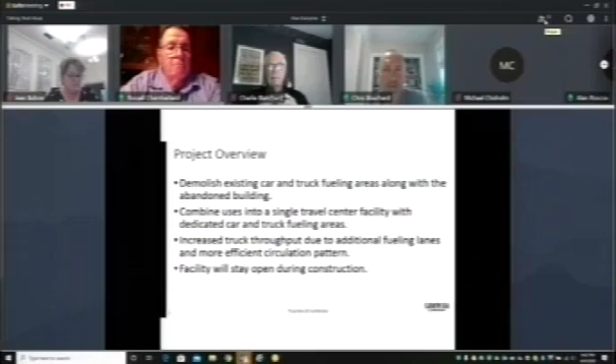We're going to demolish those, as well as the abandoned restaurant event center building in the center of the site, and combine all of the uses into a single travel center facility with dedicated car and truck fueling areas, much more similar to what you'd see at one of our normal facilities.

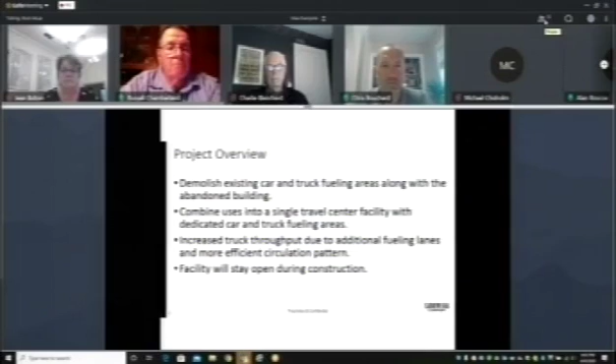One of the huge benefits for everybody is increased truck throughput due to additional fueling lanes and a more efficient circulation pattern.

I want to make it very clear, we are not expecting to get more trucks. We have all of the business that we expect to get, but right now we have 6 fueling positions for trucks, and the way that they enter the site and get to the fueling lane doesn't provide a lot of stacking on our property. We've got some exhibits to discuss this.

By changing the flow of trucks into and through the site, and by going to 9 truck fueling positions, we will be able to more rapidly serve the guests that are coming to our facility.

On top of that, all of the fuel system, other than the above-ground tanks, which are state of the art already, all of the piping, all the dispensers will be upgraded. So we should get some increased throughput just by better equipment that's going to fuel the trucks more quickly.

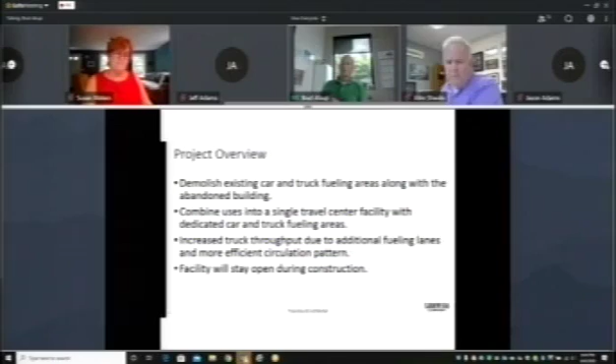And not to mention the building is going to be new, fresh looking. We're going to get rid of that eyesore that is the abandoned building. The convenience store area and gas fueling area will get much more efficient, and we will have additional gas fueling positions.

Usually the car traffic is not the issue, it's the truck traffic. So that will get better.

The facility will stay open during construction as much as possible. There will be a time where we will have to close to swap from the old buildings to the new, but we will minimize that downtime as much as possible to minimize impact to our customers, but also minimize impact to the community.

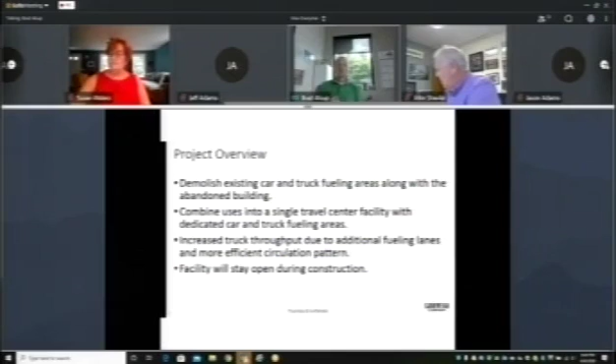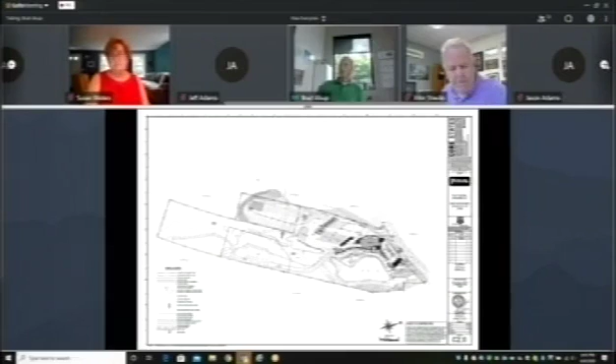You've got parking back here that's relatively undisturbed. The hotel, which is a tenant of ours, and that land lease will continue. And then there's the water treatment, the well and treatment system, and the wastewater treatment system up here. So that's the overview of the existing site.

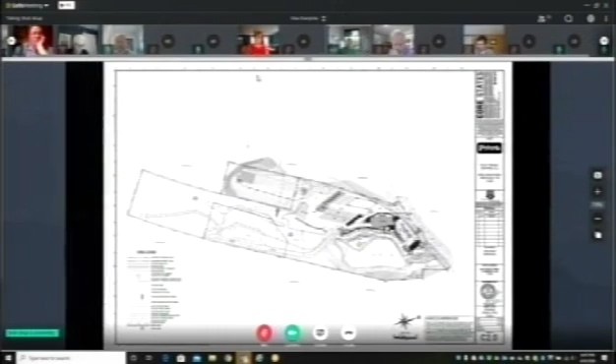Again, just blow-ups of the northern end of the site—not much to really talk about there at this point. And then the southern portion, or really the central portion of the site, where the truck fueling is.

On the screen now, you will see an overlay of the proposed on top of the existing. Everything in blue is the existing condition, everything in red is the proposed. So you can see that the new building goes in place of the abandoned building in the center. The gas fueling area will be in front of the new building, and the old gas fueling area will become parking. We have our propane tanks and our new underground gas tanks there, but that's all parking.

Then the truck fueling area moves from where my cursor is now to closer to the new building. The key that we'll get in a minute is the reversed flow for the trucks. I think it's also important to point out, where my cursor is, there's kind of an outline here, a dashed line. That is all currently a paved area.

We are removing all of that asphalt. We're going to put a curbed area to keep trucks from getting closer to the well, to get into our water treatment area. I think that's going to be a very big benefit, one, because of the decreased impervious surface, that'll help from a conservation and environmental standpoint, but also it's going to help an area that's probably a little bit abused by guys going through the boulders and pushing them out of the way. They won't be able to do that with the curb line.

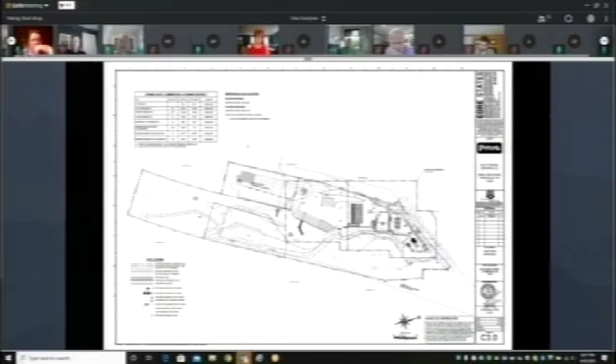We upgraded that 5 or 6 years ago. It is state of the art. Our discharge is very close to drinking water standards. It's much better than what we had before.

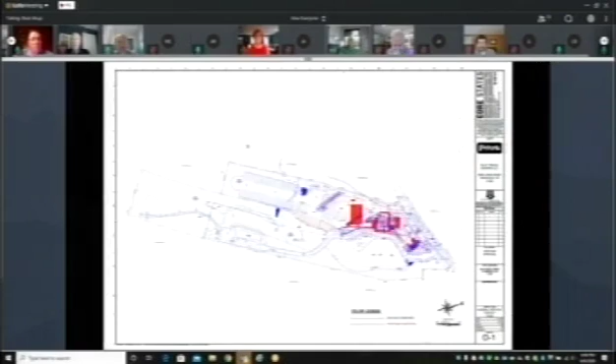I'm actually trying to go back here to the existing conditions. All of these lines you see going at a diagonal, that is the current wastewater leach field that is under our parking area. We have no problems whatsoever with that system, it works really well. But as a result of the construction and moving things around, we're going to try to get that out of the way of all the construction.

So what you'll see up in the southwest corner of the site in the parking area, you'll see some heavier line. That is a new leach field. We've already done the test pits, the soil perks spectacularly. We are working with the DEP right now to go through the permitting to relocate all of our leach field area up to this area, so it's more compact. It's out of the way of most of the traffic. It'll still be under asphalt, but that will not cause any problems.

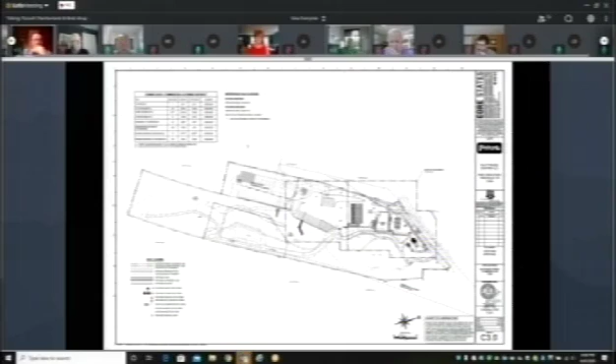So that is one thing that is not detailed in all of the site plans that you've looked at. I've got an environmental consultant working on that, and we'll certainly provide information to the town about that.

Again, kind of a blow up of the northern end of the site. So you see the new building, the new truck fueling area with scale, the new gas fueling area, and then where the gas fueling area and building are now, because of parking, we've got underground gas tanks, new state-of-the-art double wall tanks, and then this is just our propane tank to serve for heating and cooking.

You'll also see right now we're proposing a third entrance point. This is the existing car driveway, this existing truck driveway. We are working with DOT right now to try to get a third access point approved to better provide access for cars coming into the gas area so they don't have to make a bunch of turns, but also to be able to get back to the hotel a little more easily. So that would be more of a direct shot.

We are working with the DOT. If for some reason they denied us the third access, we would push to get the new access and close the old. We're working with them and hope to hear back from them very shortly. But the truck access would remain unchanged other than just being repaved and cleaned up.

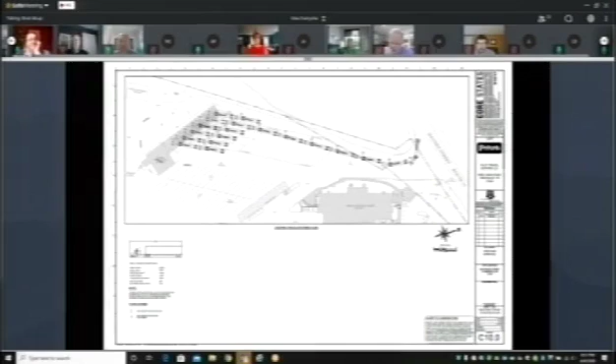Now you see with the reverse, with the new layout, instead of trucks coming straight in off the highway, they are now circulating through the site, and there's more room behind the canopy, plus more fueling positions. The last truck whose tail is not out in Haines Street is number 38. So we are doubling the stacking on site for trucks, which is a huge benefit. And again, with better equipment, the throughput is going to be increased even that much more.

Once the trucks fuel, they're supposed to pull forward to the edge of this concrete, what we call the pull forward line, so the next guy can start fueling while the one who just finished runs inside to pay or grab snacks, use the restroom, whatever he needs to do. So a much more efficient flow, and with the increased capacity, a lot more ability to get trucks in and out of the facility in a much quicker manner. This should eliminate congestion out on Haines Street due to our guests.

This is the grading plan. Rather than go into all the details, I just wanted to point out a couple of things. Here's the Ovide Pond that obviously has buffers and has to be protected, as part of the stormwater improvements to improve the treatment, retention, and recharge. I'll let Alan jump in if need be if you guys have technical questions.

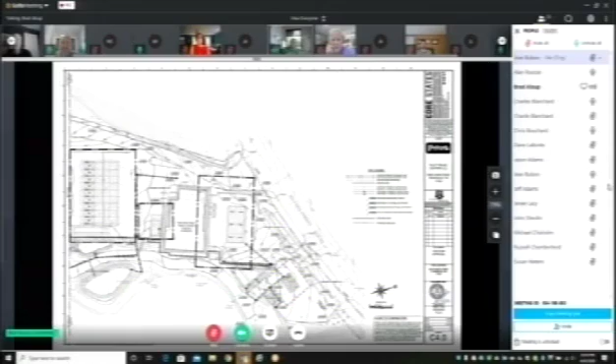Another key, I think, is currently there's parking on both sides of this driveway. That's being removed, so it takes away an opportunity for something to be dumped or spilled if somebody's parked there, whereas now it's just a drive area and there's no room for people to park.

Again, this is the grading plan. There's no ponds back here, but you can see the area that's currently asphalt will just be grass, but able to sheet flow.

The next 2 sheets are the wetlands buffers, in case you guys are interested in looking at and seeing where all the different buffer levels are. There's several dotted lines here - I don't know how easy it is for you to see. One key to notice is this circle right here, a 295-foot protective radius around our wellhead.

And the next page might help - you can see a little bit more of it and the actual well. We can't do any stormwater recharge in that area. So originally we had hoped to put ponds closer to this area where we're pulling out asphalt, but we're not going to be able to do that because of state regulations.

But again, it will be grass instead of asphalt. And then a little bit of our leach field gets into the 200-foot buffer, but it's already an asphalt area, so there's really not any change as far as that goes. All told, we are reducing the impervious coverage by slightly over 1 acre.

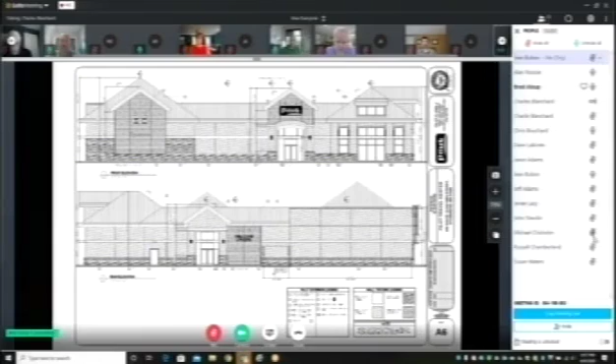Okay, Jean, do you have anything you'd like to say or add? Do we have, or have John take a time to discuss what this review has been?

Sure, I can just give you a little bit of a brief overview and then ask John to chime in. Just by way of background, town staff has been working with Pilot Travel since, I believe, the end of last summer, beginning of early fall, to get the plan to the stage that it's at now. They've come a long way. We still have some ways to go with it, but I think we're making really good progress.

The plan has been approved by the Design Review Committee already as far as the architecture and the signage. We do have a few signs that I'm working with Brad on, and we'll be having him come back for a special permit probably sometime this summer. We requested quotes for peer review, and Park Corporation was chosen to do the traffic peer review and also the stormwater management review on behalf of the Planning Board and the Conservation Commission as well.

The preliminary reports have been provided by Mr. Shevlin. You received a report last week on the traffic, and just late this afternoon we sent you a stormwater management report. I think it would be helpful now if John could go through his findings and update the board on where we are with that review process. But in summary, I think we've come a tremendous way. We have a little ways longer to go, and in the end we'll have a much improved travel center. So with that, I'd ask John to provide his findings.

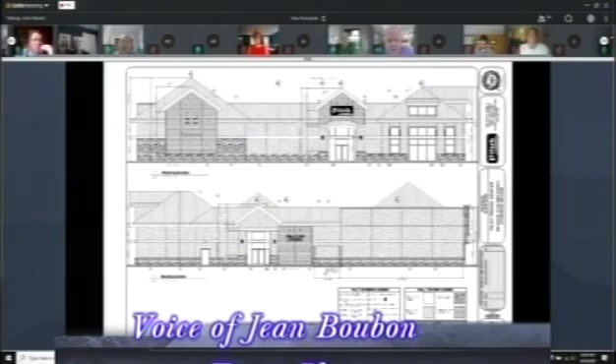Thank you, Jean. Can everybody hear me? All right? Am I coming through okay? Yeah, all right. Thanks for that description.

That helped a lot. I think as far as the traffic goes, it addressed some of my concerns. My biggest concern was the fact that it was reported in several areas that queuing occurred on Haines Street. I don't know what level of detail that queuing occurred, but seeing this plan showing how it steps up, what the queue length is, and how it's operating, and obviously they're increasing that, doubling the stacking lane, I would think that's more than satisfactory to not impact traffic.

John, we're having a hard time hearing you now. You are? Okay, what about now? Can you speak a little louder? No, we can't hear you. Is there any phone number I can call in, Jean? John, there is a phone number you can call into. What is that number? Tell him to move away from the computer. Move away just a hair, John. That might help. Try speaking now. Is it better there? Try, count to five. Can you count to four? One, two, three, four. That's better, is it better? Okay, thank you.

I know these came in late, so I think there needs to be some time for him to go ahead and review. I think a lot of them can be answered, but there may be some that I think he, and I don't want to talk for Alan, but I think he's going to provide more information for. So I don't know how much detail you want to go through these.

There's a lot of specifics and details on the plans that we made comments on. The overall stormwater drainage, I had some comments in regards to information on the soil information at the basins. Do we have any information as far as what the soil types are there?

And I know that's something he said if need be, he would certainly go out there and handle those. There's comments regarding the operation and maintenance plan. I know he said he's preparing that, so we would anticipate getting that as well. So I tried to go through all the documents as far as the plans, the stormwater report, the project narrative, notice of intent, and address the stormwater standards. I think based on the design right now, some of the standards need more information provided in order to meet those. So I left it at that with Alan, and I think we're going to continue to have further discussions. I think a lot of these should be able to be knocked off pretty easily. So that's a quick summary.

I don't know what level of detail you want us to go into with the comments, or if Alan wants to add anything. Well, John, I think we're pretty sure we're going to be continuing this public hearing anyway, so I think the only thing would be if you have any major issues you're concerned about.

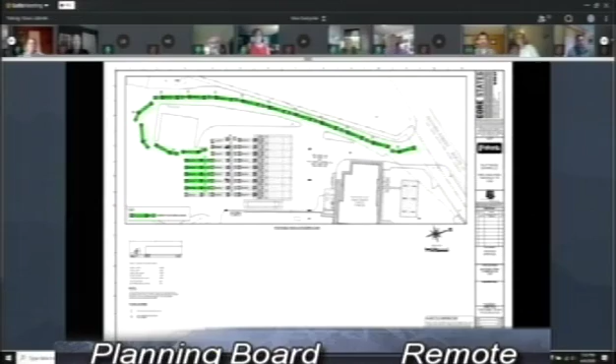Perfect, and I saw that you have the oil water separators - I saw that there were two details, one is cylindrical and the other is rectangular and concrete. I was looking at the drainage and grading in some detail. Can you just confirm that all of the inlets have oil water separation?

So I want to address the two different types of separators. If you're looking at my screen, here's the diesel fueling area. The line right where my cursor is is one break point in grading, and the line on the other side of the canopy is another break point. Everything outside of those two lines drains away from the fuel canopy, meaning we don't allow any storm water - rain, snow melt, whatever - to come into our canopy area. Everything under that canopy drains to center island catch basins, so that's the only way we're getting our oil water separator flushed. It's not too much of a flow - it's anything spilled while they're fueling, an oil leak, snow melt, or water that drips off since the trucks are wet, what have you.

So we capture all of that in catch basins that is piped to this cylindrical oil water separator. That is a standard separator that we put in every one of our facilities. It's a 4,000 gallon flow through. I don't remember the exact numbers off the top of my head, so I don't want to quote it wrong, but it has a very hefty flow rate that it can treat.

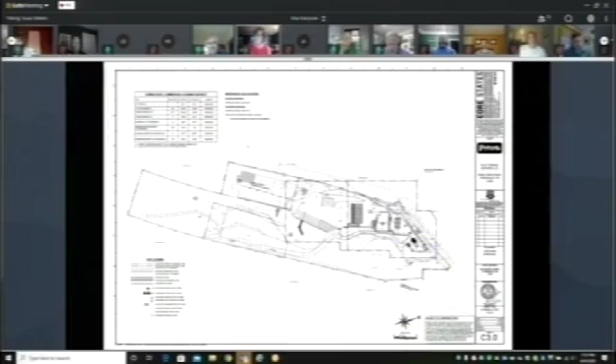Everything else has been covered that I have questions for. So I thank you for this project, and I welcome you to Sturbridge. Thank you, ma'am. Great, thank you, Sue. Chris, do you have any questions? I think everything's been answered. I thank you again, guys, for presenting this. It's a very smart design, and like everyone said, it's an upgrade, and certainly a very efficient design you guys have come up with. So thank you. Thank you. Very good, thank you.

Gene, do you have a time on the third that you'd like this to be continued to? Yes, I would suggest we continue it until Tuesday, June 23rd at 6:35 p.m. We do have other business, but it hasn't been advertised yet, so I think it would be important to do this first. Okay, I'm sorry, did you say 6:35? Yes, 6:35 on June 23rd.

Before we ask for a continuation, Gene, do you have anything else you'd like to add? No, I don't. We'll continue to work with the applicant to go through the fine details that came out this evening, some questions and comments, and work with John to continue his review, and hopefully have a final report back to you in time for the 23rd. And we do need to check the public line, Charlie. Charlie, they didn't go over the architecture yet. Right. Okay, and I have another question.

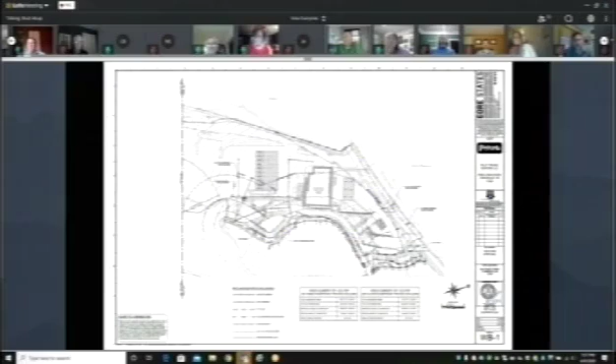Okay, go ahead, Sue. It was mentioned that there'd be a chain link fence around the tanks, is that correct? There would be a chain link fence around the propane tanks, which are here.

I'm trying to see where that sits on the property. Is that in the corner off the main property? It's basically right beside where the little gas building is now.

I just didn't know if there might be a nicer way to fence that in to protect clients, visually more. We can put rails and things like that around it, but a chain link fence typically keeps people out because they're not going to climb it. If you put a wrought iron fence, a kid might try to squeeze through, whereas with chain link it's very unlikely.

We try to plan for all of those things. And the idea of guardrails, I don't think we have a definitive answer on that. My position would be that we've got a curb to stop vehicles, and a fence that provides a visual barrier on top of the retaining wall, and that should be more than sufficient. If we go to a guardrail instead of the fence, people are going to sit on it and climb on it, and I don't want them falling to the bottom of that retaining wall and getting hurt. So I think the fence provides a better barrier in this case.

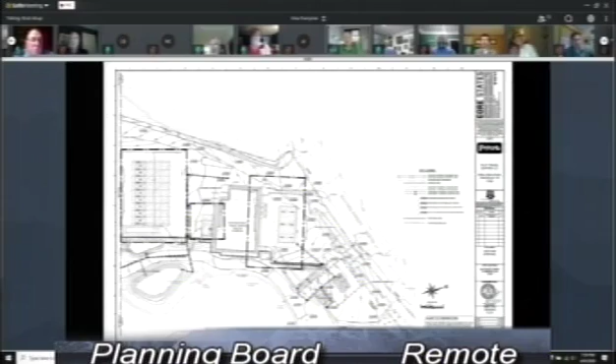I apologize, I wasn't proposing replacing the fence. I agree it's a good 10 foot tall, or 8 foot tall. I thought maybe the addition of a guide rail might help. We can look at it, but we do need to be cognizant of space restraints. Let us look at it and come back with some reasoning one way or another, or a change.

I just needed clarification. My question's been answered, and I thank you. Yes, ma'am, okay, thank you.

I just had one comment, if I may. To Brad and Alan, if you just look at the details, doesn't that wall extend up a foot over the finished grade? Just look at the retaining wall details. Let me look at that again, I'm looking at S1.1.

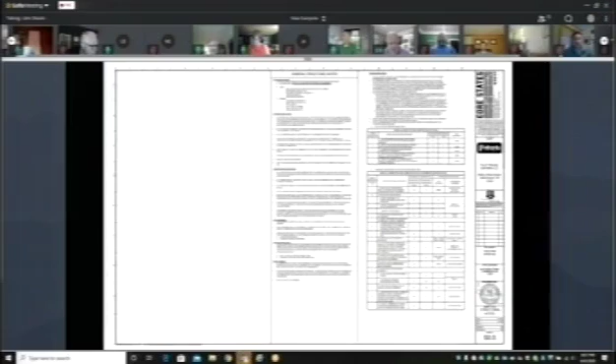I don't know what my screen's about to do. Sorry. Just something to look at later on. I thought from the detail that the wall extended up above the finished grade. Yeah, it does extend up, probably a foot. So it does extend up one foot.

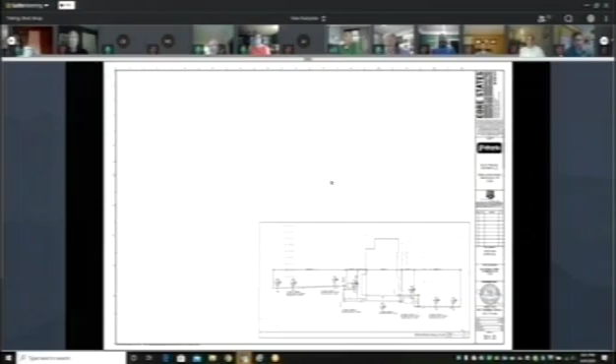So there you go, that's going to provide, in addition to the curb line, some additional barrier to vehicles going over.

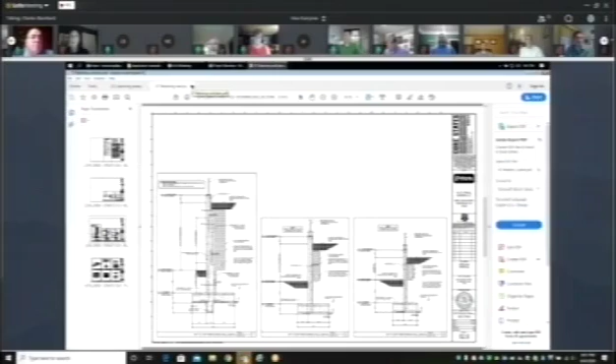Very good, thank you. So, Gene, do we have anyone from the public interested in asking questions on this section of the site plan review? We will find out. Good evening, this is the planning board meeting, public hearing on the Pilot Travel Center. Does anybody have any questions or comments on the Pilot Travel Center? We have no one on the line, Charlie.

Okay, great. Brad, you want to then continue with the architectural details? Yes sir, I'll quickly go through that.

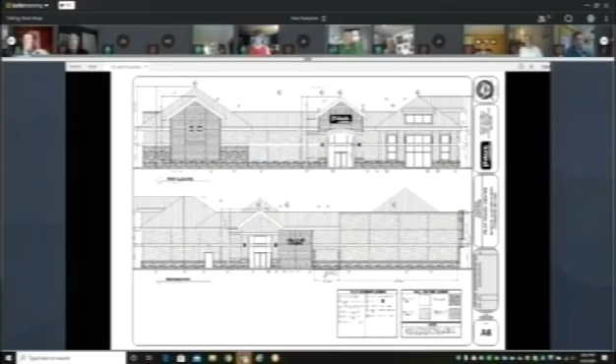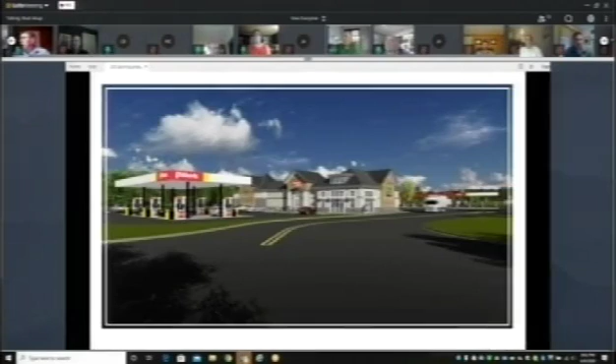So here you see the proposed building. I do have a color rendering to show you, but it's a combination of EIFS, synthetic stone, Nichiha synthetic wood panels, and we've got a standing seam roof on it. So it's definitely a more modern look than what is there now, but I hope everybody agrees it's a much cleaner look. There's a color rendering so you can see how the facility will look. It should be a very significant improvement, especially over the abandoned building that's frankly in a state of disrepair.

You can see the fuel canopies. This rendering is not correct - the Pilot sign here would not be on the canopy. We would only propose to put one on the front face, and there would be no Pilot sign on the rear canopy. I did not have the rendering updated, but the main focus is what the building looks like. So you can see very neutral tones, a good, classy looking building.

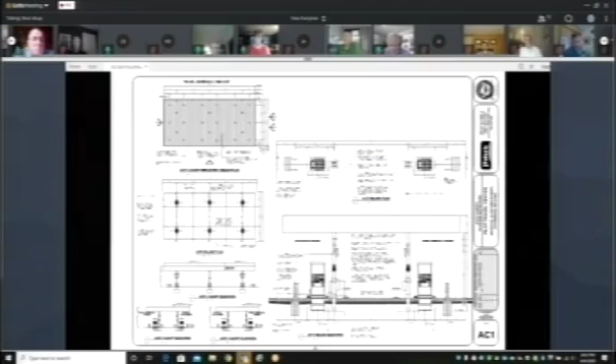This is a canopy elevation for the auto canopy, and again you can see only one pilot logo on there. The rest of it is the red and white and yellow stripe. Gives you an idea of what the canopy rendering, at least the front face, looks like.

The diesel canopy has no pilot logos on it, just the red, white, and yellow.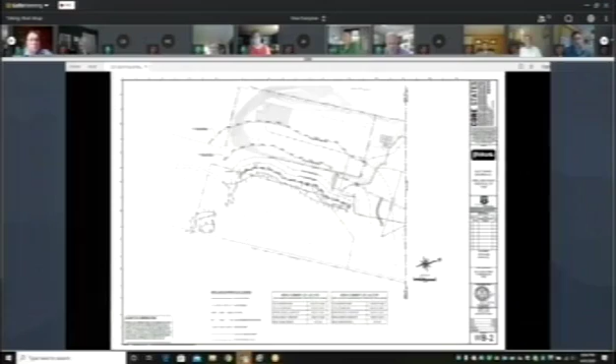One thing we did, I know there's a prohibition against internally illuminated signage. One thing I would request, we're looking to put an LED pricer for our DEF. It's the only price it has on it, so that when truck drivers come in, they can see that yes, we do have DEF at all lanes. That's important for them to know, and also what the posted price of that DEF is.

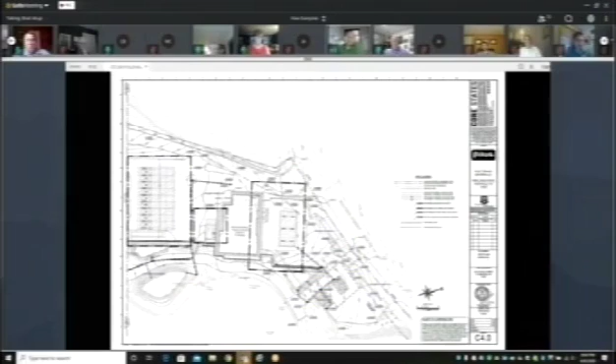This would be on what we call the entrance side of the canopy, the side that the trucks enter. It would not be visible from the road at all.

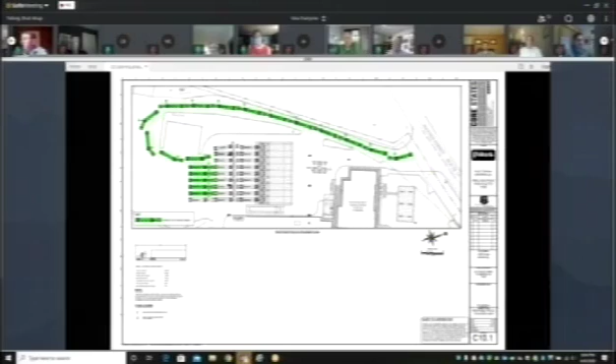We can't use a plastic-based pricer in that regard, because whenever the price changes, I can't have somebody going up on top of the canopy to change it. So we'd like to be able to do it remotely. That is one request we are going to make as far as the special permit, and see how that goes.

And that gets us to the signage. Right now I don't have a photo of the existing signs, but they're kind of small and spread out. We're looking to put in kind of a larger directory sign. We're at 18 feet tall, which I believe is what's allowed by code.

From a square footage standpoint, we're requesting additional square footage over what's allowed in the code, but you can see we're going to have the pilot. We're going to post our fuel prices, and these would be the plastic ones that they reach up with a pole to change because they're not in a flow of traffic.

Subway, Cinnabon, Auntie Anne's, and then PJ Fresh is our internal food offering: pizza, wings, pot roast. It's got a variety of things, many of which are currently sold in the diesel building. But that's the sign we're proposing.

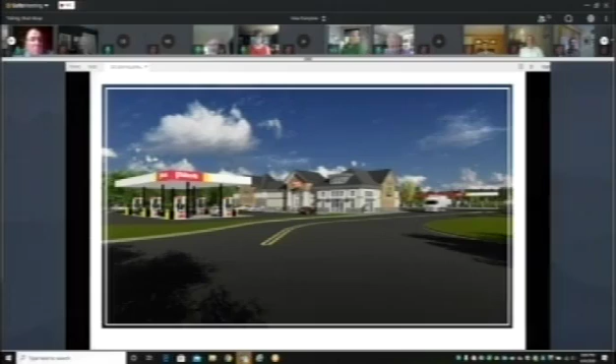The wood-looking thing you see here is actually Nichiha panels that match what you see behind the pilot sign, and the stone at the bottom of the sign would match what's on the building, so it would tie in architecturally. I'm sorry, I don't have that in a color rendering, but it would tie in architecturally and provide a more cohesive sign and building package.

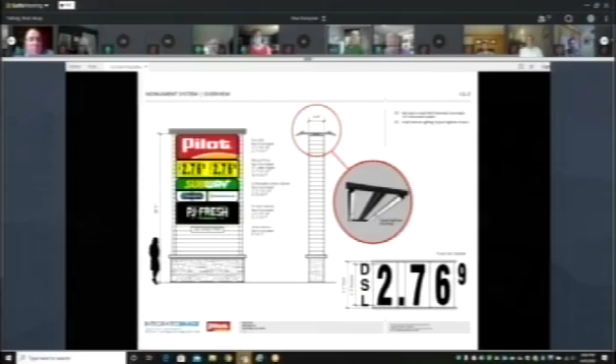It would enable us to let our guests, the motoring public, know who we are and what we have to offer for their consumption. And these signs would be externally illuminated.

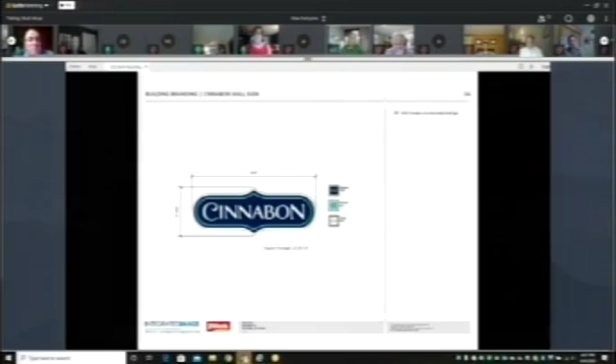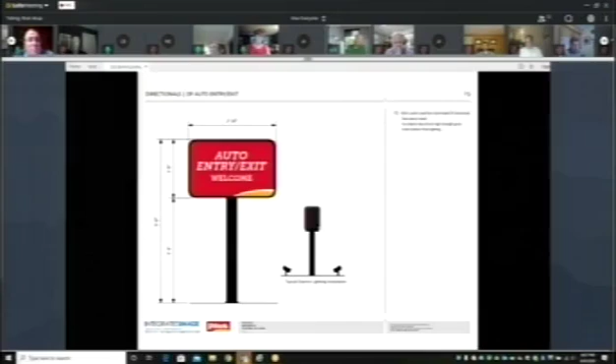Going to, I believe, Dane's question about the directional signs. So at the car entrances, the entrances designed for passenger vehicles, this is what you would see. One at each entrance, auto entry and exit, pretty straightforward. And then for the truck driveway, you're looking at the same thing.

These are compliant with the ordinance, if I'm not mistaken. Certainly would like to have bigger ones if at all possible, just especially for the trucks to make sure they know exactly which entrance to go to. But these are compliant, and that's what we've requested permission to install. And I believe that is the end of my presentation.

Great, thank you. Jane, do you have any comments on the request or some of those special permit requests? Yes, we'll be working with Brad as we go forward to refine his sign package. Almost all of the signage on site is compliant, so the monument sign, one of the pilot signs on the building, and the DEF will all be special permit requests that will come before this board, probably later in the summer. There's plenty of time, as construction will take some time, but probably July or August we'll be working on that.

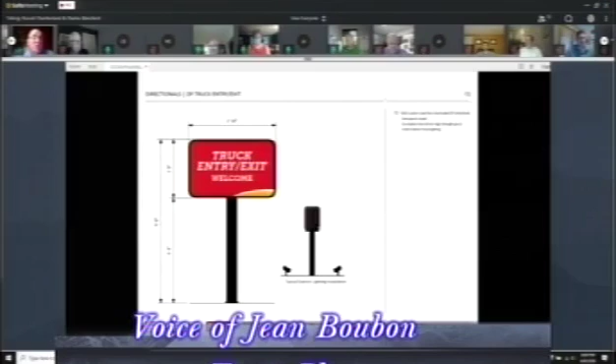Okay, great. Russ, do you have any questions or comments on this part of the presentation? No, I just think the building looks great, and can't wait to see it come to fruition. Thank you. Jeff? No questions. Good work. Looks good.

Great. Dane? No. Dane? Thank you. No? Great. Okay, Mike? It's just Charlie. Sue?

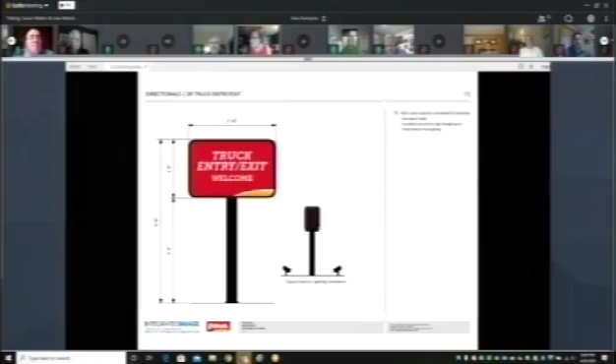Quick question, the welcome drivers sign, are you looking to have that illuminated? Typically it is externally illuminated, so we could put a row of lights on. There's a canopy over that building, so that when people are coming in and out, they have a chance to get out of the rain before they open the door. So at the edge of that canopy, I can put a row of lights that just shine up onto it. So it would be external.

Great, that's great. Chris? No questions. Okay, good. Jane, do you want to check if anyone from the public would like to make any comments at this part of the presentation?

Okay. Would any member of the public like to make a comment on the architectural renderings of the Pilot Travel Center? Is there any public comment on the architectural renderings of the Pilot Travel Center? No, we're all set, Charlie. No one's on the line.

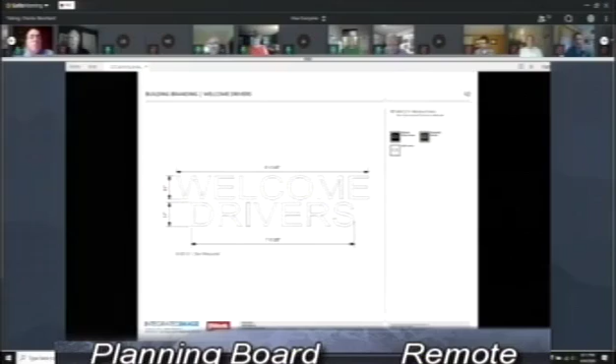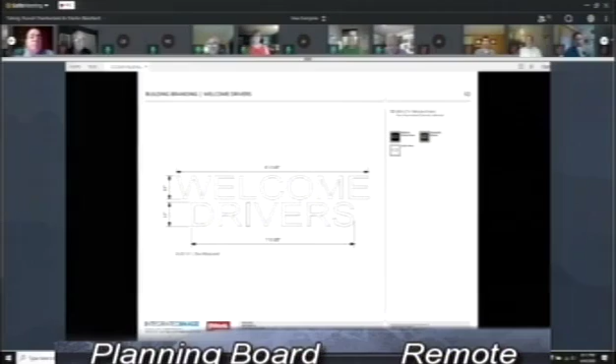All right, great. I think we're probably ready then to make a motion to continue the public hearing until 6:35 on June 23rd. Would someone like to make a motion? So moved, Russell. Second. Sue? Thank you. Russ, how do you vote? Yes. Jeff? Yes. Dane? Yes. Mike? Yes. Sue? Yes. Chris? Yes. Great, and I vote yes.

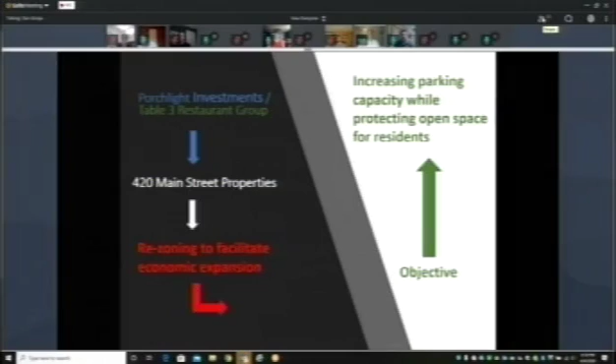This is just showing the 420 Main properties. Really what we hope to do is rezone for additional parking to continue to facilitate the economic expansion that we started back in 2014. Going through the process last year led us to the objective of really increasing our parking capacity, which was not our sole one, but I would say it has a greater focus on protecting open spaces for residents in this plan. So we can move on to the next slide.

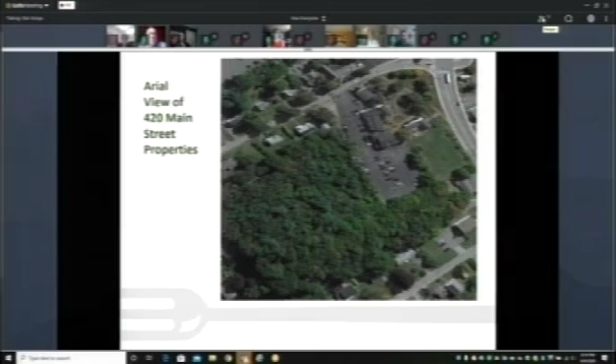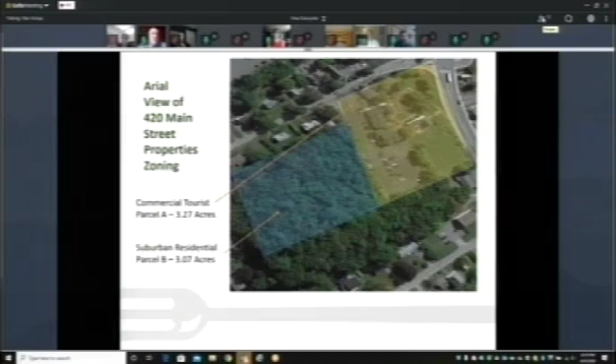So if we could move to the next slide. I just graphically represented this with some overlays. These are not architectural drawings, they're not existing, but you can see the general breakout of the land is 3.27 acres for commercial tourist and about 3.07 acres for suburban residential.

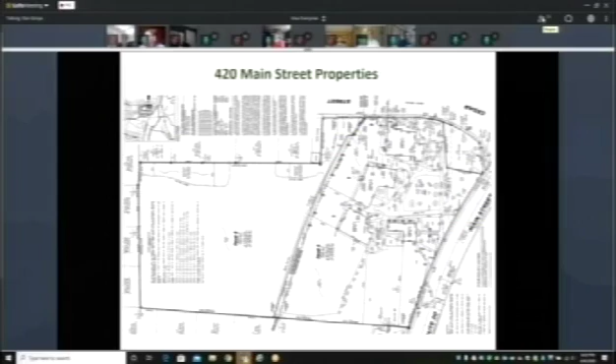So if we could move on to the next slide. Thank you, Janae. Not only do we have our own properties, brands, and businesses using the site, which includes Cedar Street Grill, but we also use Vetcor, the Sturbridge Vet — we have an agreement with them because without our lot, they wouldn't really have viable parking. Table 3 has sales offices, and there's also retail offices in Building 1. In addition to our businesses, we've added the Alpheus Wight Room, which is in front of this building, and we'll see this represented more clearly in another slide.

This is just to show the drain that we have on this parking area, because when you look at the parking area, your general thought might be, wow, that's a really big parking area, why would you need more? We have Excel Advertising, a tenant that takes the majority of building number 2. We have the Barn at Wight Farm, which has a capacity of 175. We've added the Cedar Street Cafe on the first floor of building number 1, and we have another tenant by the name of NSS in building number 4 upstairs, whose entire building we've renovated for them.

So if we could look at the next slide.

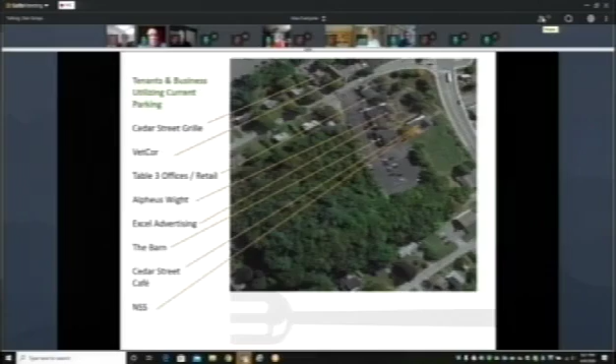You'll see the parking lot, and I'm sorry for the size of these things, I hope you can see it okay. The buildings are represented as Building 1, 2, 3, and 4. The total spaces available in this parking lot are 103 plus 5 ADA, which is 108.

When we look at our daytime parking after our tenant reserve, what we have leased to other tenants that are dependent upon our parking, and us leasing that space to them to do business, and factoring in the ADA spaces, we have about 61 spaces.

So when we look at what our current focus businesses are right now, the Barn at Wight Farm and the Alpheus Wight Room have 175 and 85 capacity. We've run into this a couple times already, where we've had a large memorial meal in the daytime and a Christmas party. We really don't have the capacity to put all the parking we need during the daytime into our existing businesses, and we've come up short, and had to use shuttle buses.

So if we're tight during the day, we're certainly going to limit any future expansion that we could do.

Our evening parking, we get a little bit better because after 6 — and Gene, I know these are different numbers than you've seen, because on the prior version I excluded the people that aren't going to be there for our tent application, because of the current situation we're in. But this is real world, post-COVID, and I'll say pre-COVID as well.

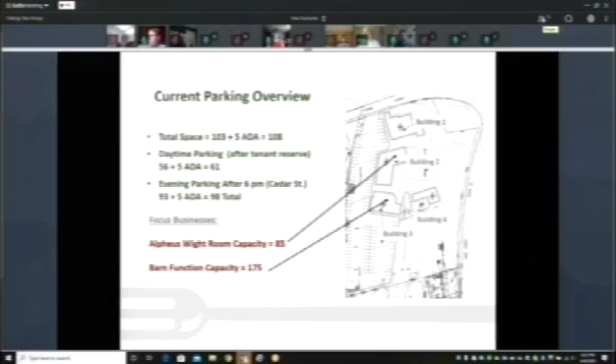So if we go to the next slide, we've got some plans for future expansion.

If we can find a way to cure some of our parking woes, we plan to relocate Excel Advertising from Building 2, where they currently reside, into Building 1, which currently has some antique and other retail businesses. We plan to do a full-scale renovation, as we've done on the cafe and other buildings on this site, on the interior and exterior. I think the design board will be happy to know we're not going to change the look of the building at all — it'll still have a very colonial look and fit right in with that colonial village facade and feel we have on the property.

We're then planning on moving Table 3 into that building for additional wedding and ceremony functions, which would give us control of that entire building with a potential capacity of around 210 people. That would certainly be a challenge, adding another 125 people for parking.

We're also potentially looking at an engineering study, since we've just gone through a significant upgrade in the kitchen in the barn building, to connect the two structures via an underground tunnel to move services and food between the buildings as we service this new space for weddings and ceremonies. We could have already been selling this space many times over, as our barn capacity is pretty much sold out, and definitely sold out during the peak months of the year.

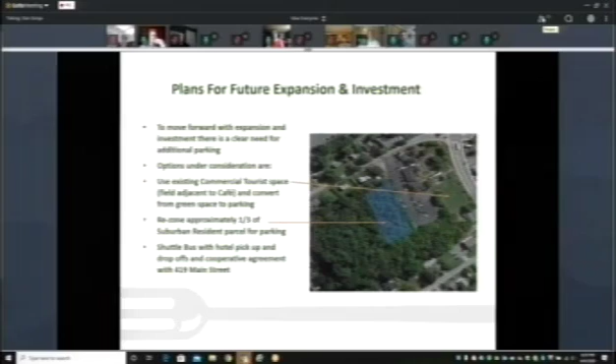This is just a snippet from the design study done by McClure Engineering of rezoning the space, showing how we have the existing parking lot, and we would come just behind what is now the Beeman home, who do support this. We've had discussion with them.

Again, the 2019 proposal was to convert all of it, and we're looking at just a third of it, 73 spaces. It would make a big difference for our business and the other businesses there, and it would go a long way towards providing a majority of the land to continue keeping it as green space. Next slide. So I think this is just a summary, and you guys have probably heard the majority of this through the presentation.

This will allow us to continue to invest in our commercial tourist businesses. We have some good plans that I think will be very viable for us in the town, and provide the parking space needed, and give our residents and neighbors the continued assurance of green space abutting their properties. If we are awarded this zoning change, I really think this will strike a really good balance, as Gene mentioned earlier, for both us and certainly for the residents.

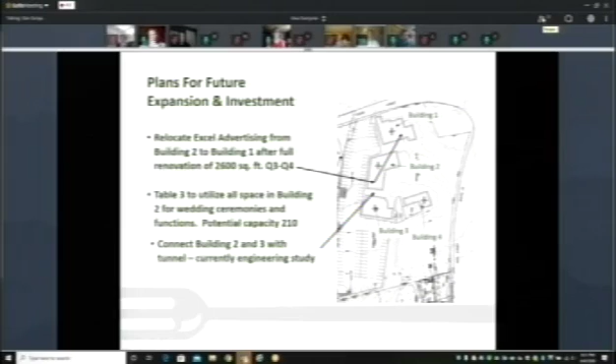Yeah Dan, to the west side of the parking lot, where it butts the existing parking lot, is that going to be an entrance and exit also? Let me go back in, if you could go back to where we were showing the parking lot tonight. So where exactly are you looking at, Tom? The only entrance to the parking lot would be, we need the slide. Oh, the other slide, Janae, showing the...

Oh, yeah, you just had it. One right back. There, here you go.

So the only entrance to this is where we're giving up spaces right here in the existing lot. So you won't be able to enter it from the road.

Again, this is a design study. We asked them to take it as far as they could. He put a small retention pond in there. I said I really don't want retention ponds because of the way they look, especially for the neighbors. I want to go with underground drainage requirements, but he has one just located as a possibility example.

But you would still enter the parking lot the same way. You'd enter in here, and then there would be an exit up here.

Okay, so you answered my question. It just looks like at the far end—not that I'm against it—but is there any way to put another entrance and exit at the far end, the west end, to the left of where those four parking spaces are?

Are we looking here, Tom? I can't—it's Russell, by the way, Dan. I'm sorry, Russell, apologize. It's okay. I usually don't give presentations while I'm under the influence of codeine and painkillers.

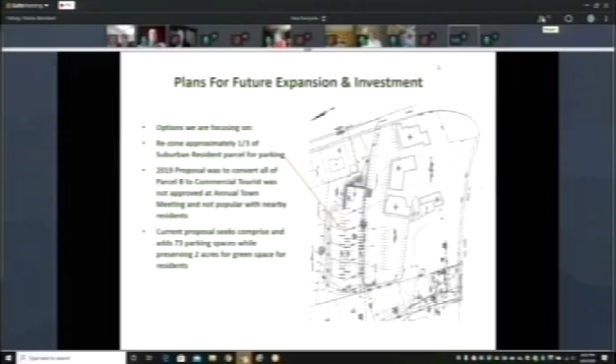Gene, do you have the wording for the motion to send this to the town meeting? First, Charlie, will this be on this town meeting? We do need to check the public line to see if there's anyone listening. Is there anyone on the public line for comments on the rezoning for 7 Cedar Street? We have no one on the line, Charlie.

So the appropriate motion, provided the board would like to support this request, would be to move to support the proposed zoning map change requested for the property located at 7 Cedar Street from suburban residential to commercial tourist district as requested in the petition, and to provide the recommendation to the town administrator and board of selectmen for inclusion on the town meeting warrant.

Can I have a motion to approve that? So moved. Second? A second. Very good. Russ, how do you vote? Yes. Jeff? Yes. Dane? Yes. Mike? Yes. Sue? Yes. Chris? Yes. And I vote yes.

Very good, thank you very much. Dan, thank you very much. Brad, thank you. Thank you, Dan. Backup guy tonight, so I thank him for joining us. Good luck with your shoulder. Thank you so much. Speedy recovery, Dan, get some rest. Thank you so much, guys, and thanks for all your support.